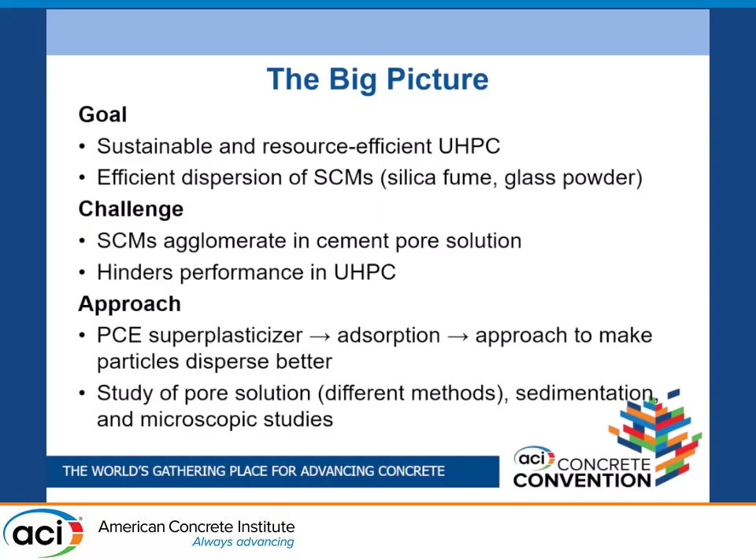So, extraction of the pore solution. Before we talk about extracting the pore solution, let us fully understand what a pore solution means. Pore solution is the liquid phase present in the pores of cement paste, either in the gel pores or the capillary pores, and it contains dissolved ions such as calcium, sodium, potassium, hydroxide, sulfate. These are in larger concentration, the major ions, and there are also some minor ions such as aluminum, iron, and magnesium.

Why are we studying the pore solution? Because understanding the pore solution chemistry is pivotal, the key to controlling dispersion. If we understand the pore solution chemistry, we can clearly understand how the SCMs disperse in this solution and how the PCE reacts in the pore solution.

These are mainly extracted by two methods. One step of our study is comparing the two methods, vacuum filtration and pressure squeezing. In step 2, we analyze the dispersion of the SCMs using the pore solution extracted by these two methods. And in the characterization part, we study the pH and ion concentration of the pore solution for different variations, like the types of cement, the water-cement ratio, and different squeezing pressures.

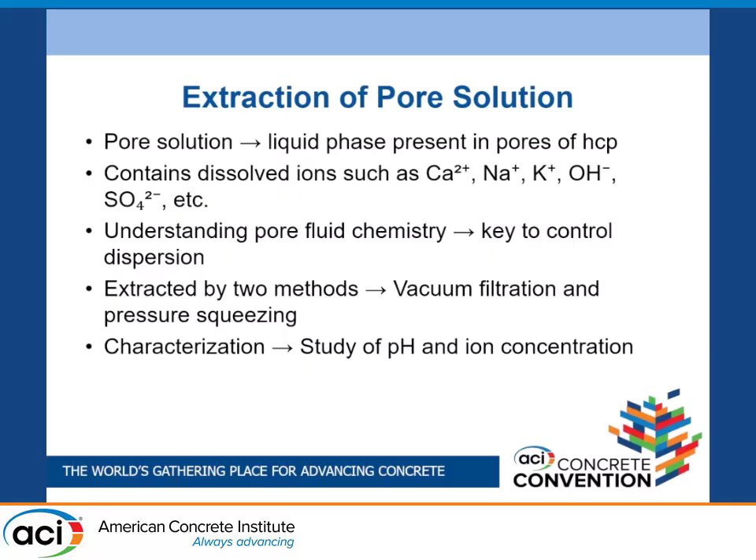The materials we used are ordinary Portland cement type 1, type 2, type 1-2, and oil well cement, all conforming to ASTM. The supplementary cementitious materials we used were mainly silica fume and glass powder, and we also used fly ash and limestone powder. We mostly used a water-cement ratio of 0.4, but we also used 0.7 and 0.55 for comparison.

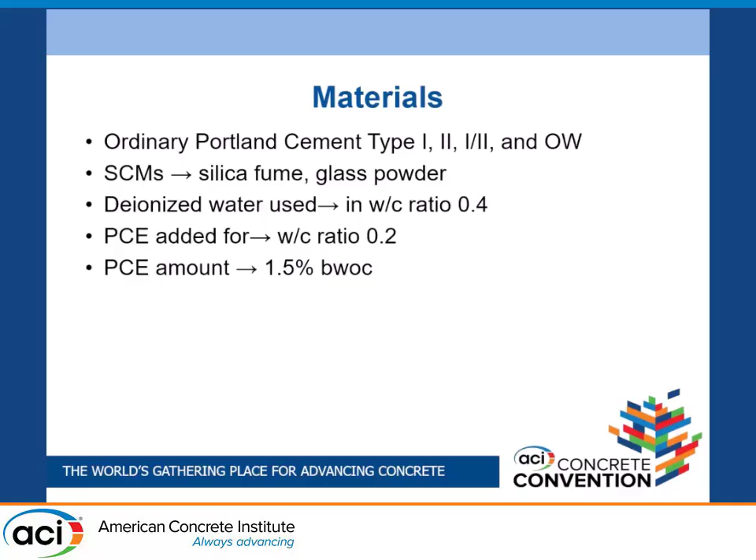For the squeezing, we only used a water-cement ratio of 0.2 because we are targeting our study towards UHPC, and the squeezing apparatus gives better results with a low water-cement ratio. But for one comparison, we did one sample with a 0.4 water-cement ratio for squeezing as well. And when we added PCE for squeezing, we added 1.5% by weight of cement.

I'll be talking about the specimen preparation. It's a very simple test. For vacuum, we are using 200 grams of cement with deionized water, and those samples were mixed for 1 minute in a Resodyn acoustic mixer at 90% intensity, and they were sampled after 30 minutes. Then for squeezing, we are using 300 grams of cement.

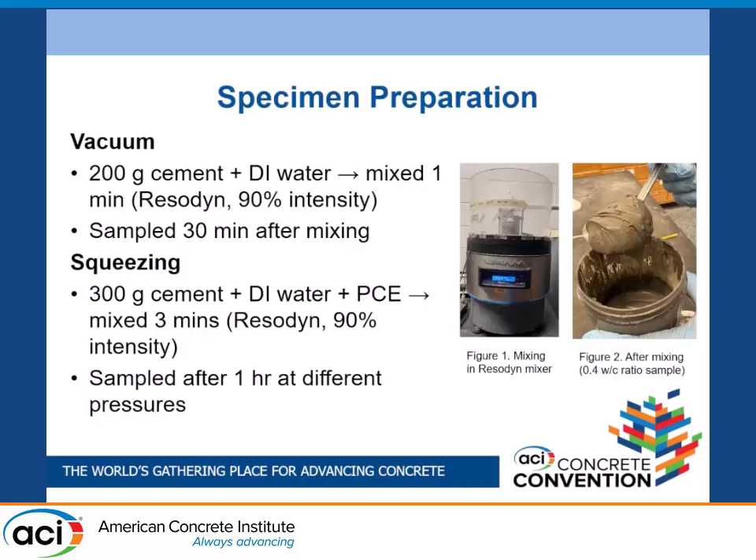There might be a question why we are using different amounts of cement for different processes. The squeezing has a relatively large cylinder, and the sample extracted at the end of the process is relatively little. So we want to extract more sample with one test, because the test is very labor intensive, as the instrument is heavy. And we are mixing it for 3 minutes, because if we mix for just 1 minute, the paste will be relatively dry and there is no proper mixing. So we are mixing it for 3 minutes.

Let us see the comparison between the two methods. As I already stated, this is one of the major steps of our study. So vacuum versus squeezing. You can see a schematic of the vacuum filtration. Vacuum filtration is a very simple technique that uses a pressure gradient to separate the pore fluid. We are not using gravity filtration because it is relatively slow. So we use vacuum filtration, and the vacuum range is very little, around 1.5 to 4.5 psi.

As for the quantity of sample we extract, at 0.7 we are extracting about 70 grams of water from 140 grams of sample. The extraction time is approximately 10 minutes, and we stop the extraction when all the solution is out and the paste is completely dry. For the extraction, we use Whatman No. 40 filter paper for the first extraction, and we further filter that solution with Whatman No. 42 filter paper.

For the squeezing apparatus, you can see in the right side figure a large steel apparatus. It's very heavy, and for squeezing we extract pore water at a water cement ratio of 0.2, and as I mentioned, for comparison we also extracted one sample at 0.4 water cement ratio. The paste is pressed hydraulically in the cylinder, and we use 2 filter plates at the top and bottom of the specimen, each consisting of 7 filter discs, so that we get a very clean filtrate at the end of the sampling process.

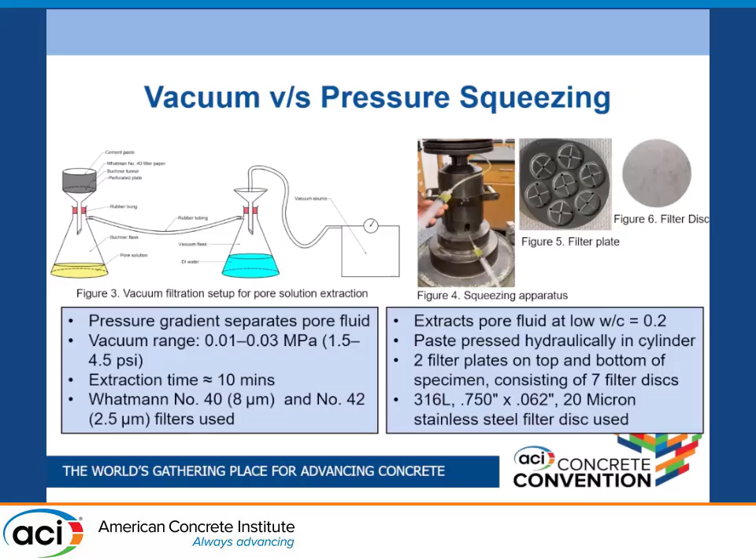The measurement of elemental concentration was done by Spectro Arcos ICP-OES. We used an inductively coupled plasma emission spectrometer because it gives very good results and can detect very small amounts of ions. We determined the major ionic species such as calcium, sodium, potassium, and sulfur. We also determined minor ions such as aluminum, iron, and magnesium, but they had very low concentrations, so I'll not discuss them in the results, because they only showed below the detection limit. The principle is that each element emits light at a characteristic wavelength when excited in plasma, and we got elemental concentration in millimoles per liter.

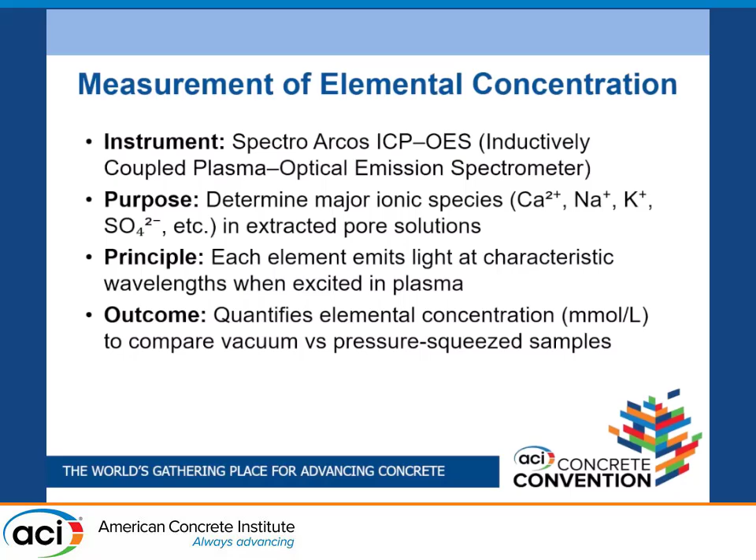The next test we conducted was the sedimentation test. This is a very simple test, yet it's effective. We take a weighed amount of sample, with a known weight based on the bulk density of the sample, and mix it in about 100 ml water in a Resodyn mixer. Then we quickly transfer it to a 100 ml graduated cylinder, note the time for 1 minute, 3 minutes, 10 minutes, and 30 minutes, let the sample settle without disturbing it, and visually capture the sedimentation rate using a mobile phone camera.

So it's very simple, yet it's a measure, but we cannot say it's very accurate or relevant, because in sedimentation there are multiple effects, such as viscosity as well. So to support this, we further conducted other types of tests. This is the sedimentation test for the silica fume. I have only shown silica fume, but we conducted it for other SCMs as well.

In figure A, we can see DI water. The silica fume is settling very rapidly, but in pore solution it's settling even more rapidly, which shows that the ionic concentration of the pore solution leads to a greater sedimentation rate. When we add PCE to the solution, the solution is stabilized and the sample height has risen. So it's one of the tools that tells us that in the pore solution, the particles tend to agglomerate.

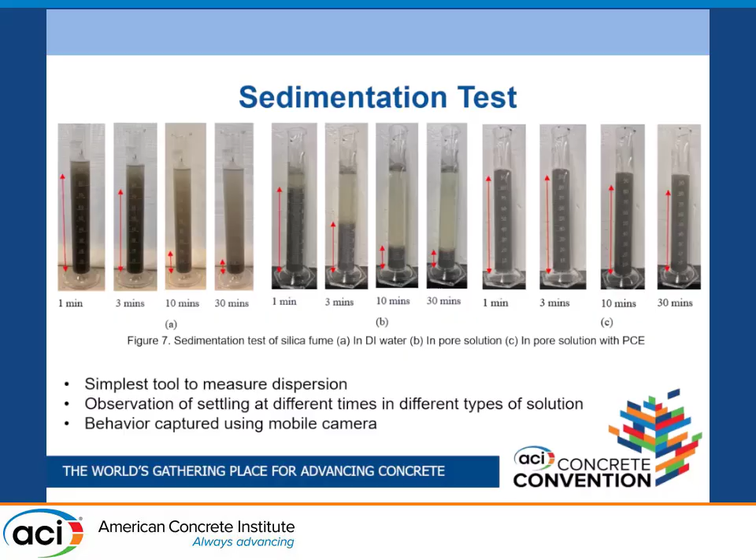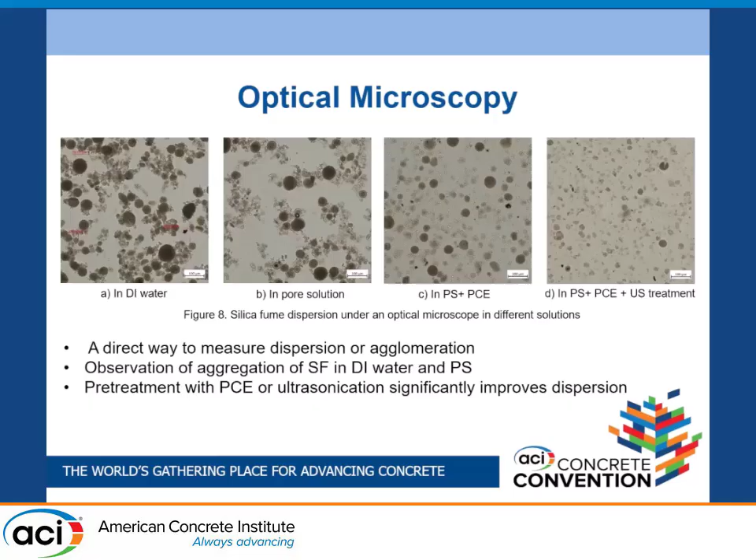The pH results are basically the pH of the pore solution, and we are trying to see the pH of the solution in water to binder ratio of 0.7 and 0.4. And obviously we see that in water to binder ratio of 0.7, the pH is low. It's because of the dilution effect. So ignore the first type 1 cement, because there might be some error in the measurement or sampling issues.

But in all others, we can see that there is not a significant difference, about 0.01 to 0.05. Even though the sample is diluted, the pH is not very significantly affected. This can be due to the fact that when we dilute the sample more, there is more release of the ions, increasing the alkalinity. So therefore, the reduction is not very significant.

And when we use the silica fume, the pH is significantly reduced, and this has 2 things to do with it. One is the use of cement. The use of silica fume reduces the cement content. That's why the pH decreases. And another is silica fume is pozzolanic and consumes calcium hydroxide, so that the pH is reduced.

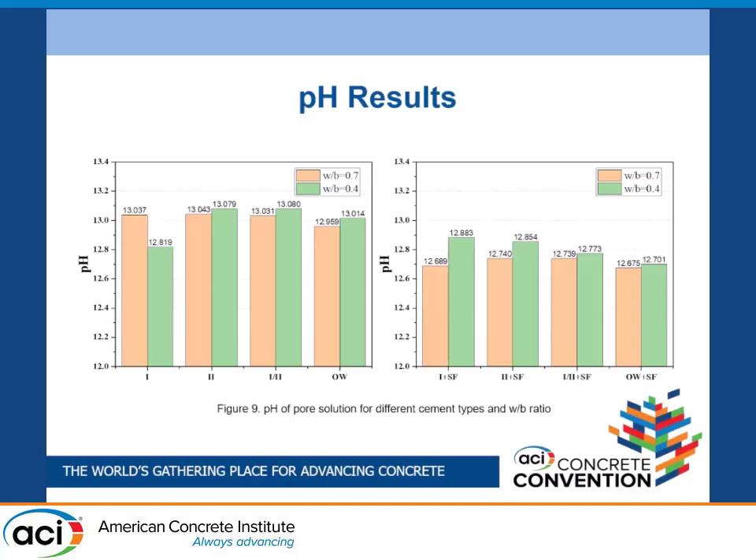Next is our elemental concentration results. So in the elemental concentration results, I have shown 4 different elements: calcium, sulfur, sodium, and potassium. I already mentioned I did not include the minor species, though we have the concentration data of that. So in the left of the graph, I have shown the concentration for calcium only. So please don't be confused that calcium is higher than others, because the right side has higher concentration up to 500 and the left has lower concentration. So the right side is concentration for sodium, potassium, and sulfur.

The calcium ion concentration is relatively low as compared to sodium, potassium, and sulfur in the cement pore solution. And we can see that type 2 cement has more calcium concentration than the other cements. It's because of higher C3S content in the type 2 cement. And the sulfur content is more in type 1 cement because of higher sulfur trioxide content in the type 1 cement. And the alkali content is more in type 1 than type 2 and then oil well.

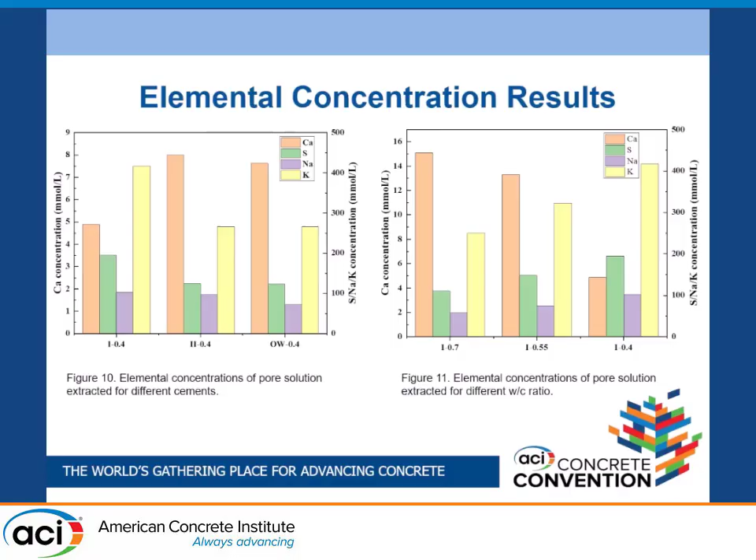And for the water to cement ratio of the cement, as we increase the water to cement ratio, the calcium ion concentration is higher. This has to do with the fact that as we dilute the sample, more ions are released so that we get higher concentration of calcium.

Next, we have elemental concentration results for the vacuum filtration and the squeezing apparatus. And the next is for the same squeezing apparatus at different pressure ranges. So we can clearly see a trend in the vacuum filtration versus the squeezing. The calcium ion concentration has increased significantly. In the vacuum, it's around 5 to 6 millimole per liter, whereas in the squeezing, it's around 25 to 26, which is like 5-fold.

So our hypothesis is that in the vacuum filtration, the larger pores are drained out, and in the squeezing apparatus, the smaller pores are drained out, so that the calcium ion is released from the smaller pores. That's our assumption, and our assumption is consistent when we do the analysis in the different pressure ranges. So 20K here represents the force applied as 20,000 lbs, which is equivalent to a pressure of 28.3.

So there is a small chart. We have applied a pressure up to almost 200 megapascals in the pressure squeezing, and we see a consistent trend of increase of calcium concentration. The other ions are not pressure sensitive, as we can see, there is no significant trend or significant behavior.

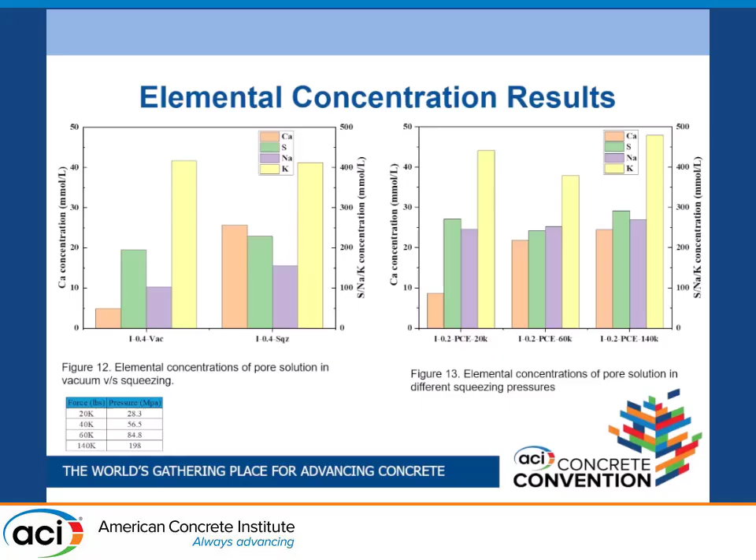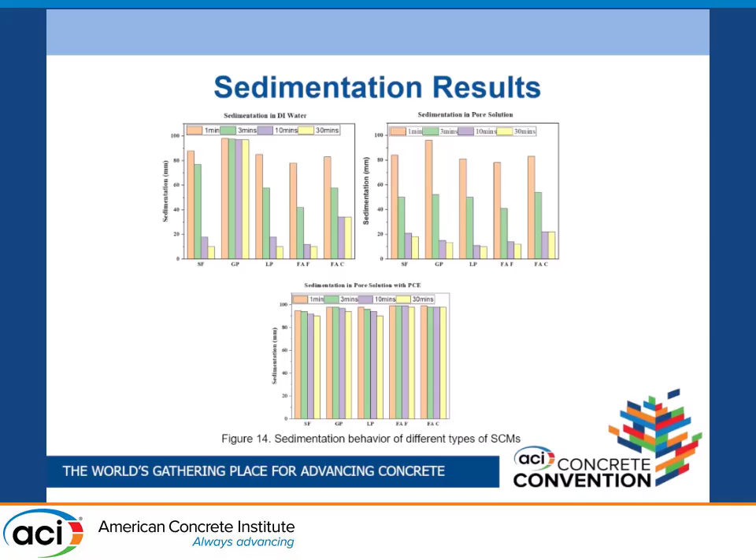So from this study, we get the following conclusions. The first is that pore solution chemistry depends on different factors such as water-cement ratio, cement type, and extraction method. Second is that sedimentation occurs rapidly for untreated pore solution, and PCE enhances the stability of the supplementary cementitious materials. And the other conclusion is that optical microscopy proves an efficient method to support the sedimentation results.